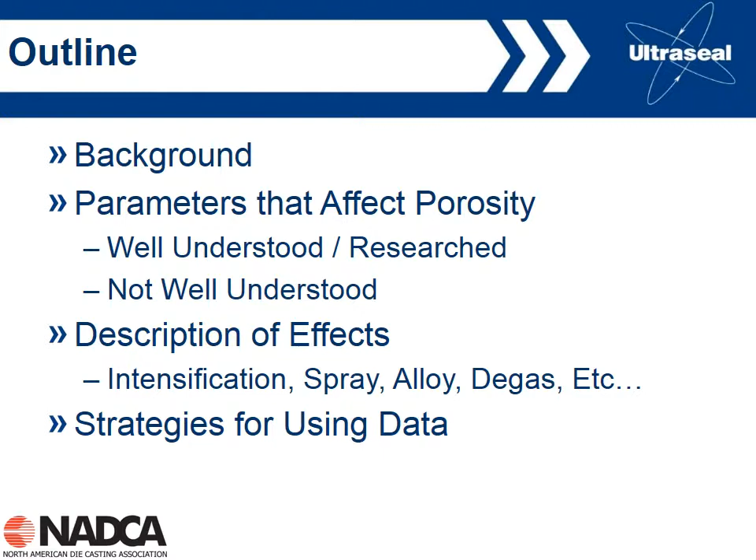So basically what we're saying is if we can control the porosity formation in die castings, we can have control over many of the types of problems that these end users have with die castings. We know many of the process parameters that control porosity. We just talked about a few of them in terms of intensification, fill time, die temperature, metal temperature, things like that. And we have to be careful.

This implies that we have this great need for great control over the process. Certainly there's lots of buttons on both the die casting machine and the peripheral equipment. And Alex Monroe at NADCA used to refer to this as just 'play with the knob' syndrome. So just turn the timer to the correct setting on the ladle, the shot delay, or some other piece of equipment, and that should allow me to fix my problems. Well, that's really shooting in the dark. That's really not a good approach in terms of trying to fix your porosity problems.

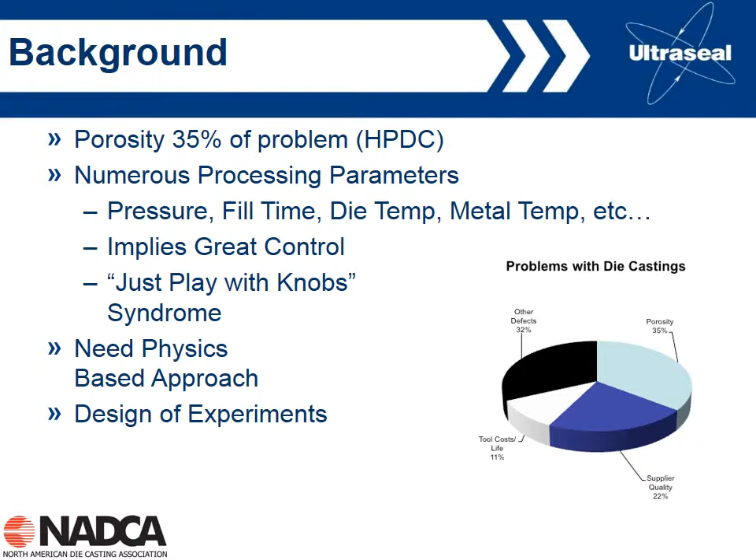That could be an important part of it in your facility, in your plant.

So if we keep going in terms of background, we talked about this in detail in webinar number 1, where there are basically 2 sources of porosity in die castings. We have solidification shrinkage, the volumetric contraction that occurs as we go from liquid to solid, and then there's gas entrapment from various sources. In terms of volumetric shrinkage, for aluminum alloys it's around 6% volumetric contraction upon solidification. With zinc, it's a little less, 3.5 to 4% or so. And magnesium somewhere in the middle, probably about 4.5% or so.

But if you go and look at the literature, when people talk about the level of porosity in die castings, it's very rare to see a casting that's got more than 3% porosity. So this implies that we can't discount one source of porosity over the other. We're going to get both air entrapment and shrinkage porosity in die castings.

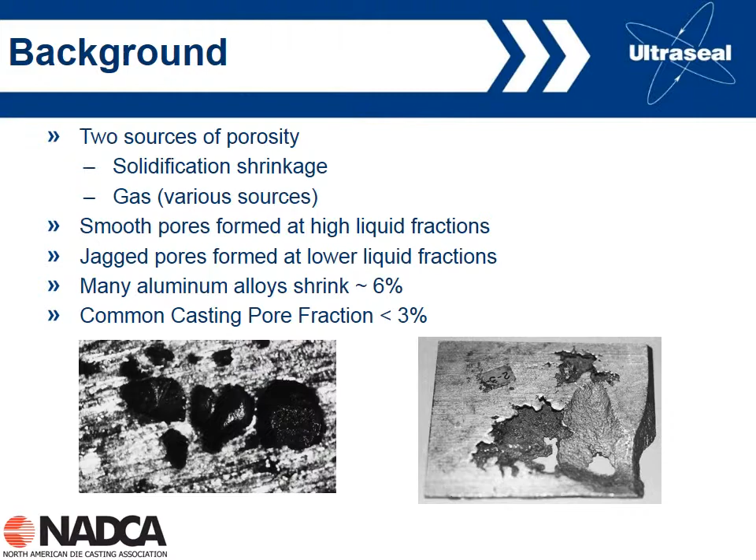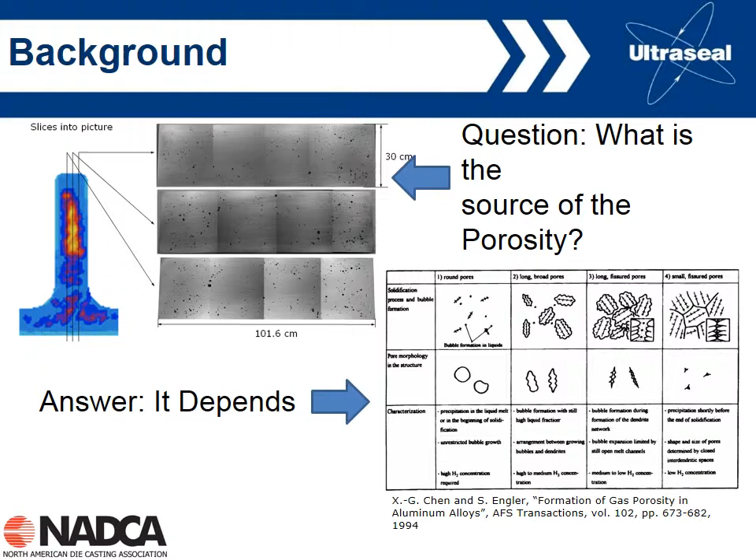So porosity is going from smooth to jagged based on the hydrogen concentration, based on when it forms during the solidification process. Early in the solidification process, they're spherical. Late, they're jagged. But these are all coming from gas.

So what we want to talk about today is process parameters that can affect porosity.

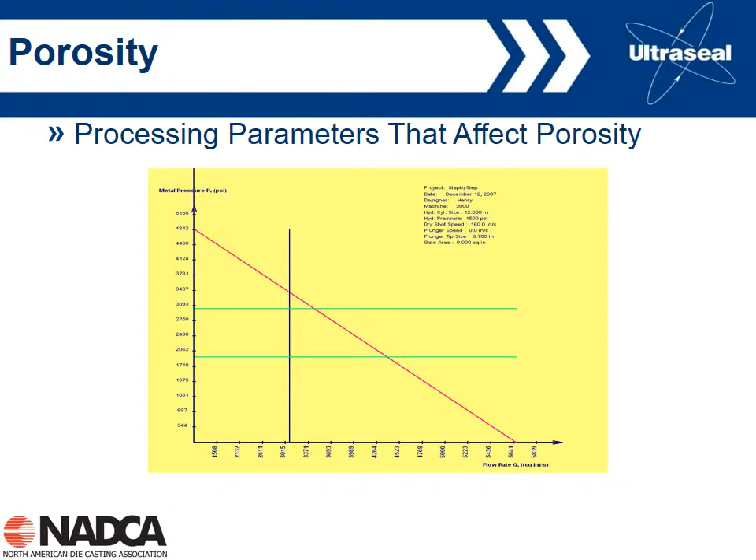Unfortunately, what we find is above 170 bar or so, 2,500 psi, intensification pressure has a diminishing return. What we mean by this is, for instance, if we don't intensify, if we have zero pressure intensification, we're going to get about 6% porosity, because that's the volumetric contraction we get upon solidifying aluminum. If we apply 2,500 psi, maybe we can shrink that down to 1% porosity or so.

Above this, we get a diminishing effect. If we go above 2,500 psi to maybe 5,000 psi, the porosity is only slightly reduced, maybe from 1% to 0.75% or so. So we get this diminishing effect with pressure, and we'll talk about this later as we go through today's webinar.

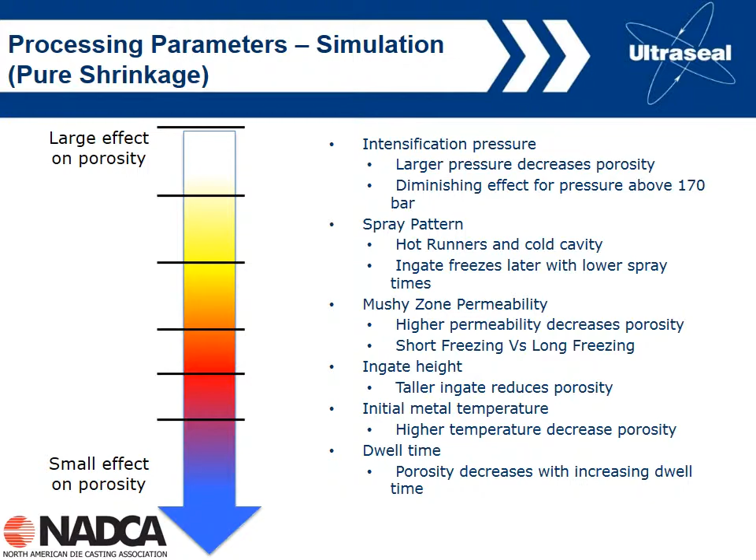In terms of processing parameters, there are a number we can look at. We've got shot profile in terms of the fast shot, the slow shot, and the pre-fill. Note that velocities matter both in hot chamber, not just cold chamber, and we'll talk about why that is later in the presentation.

And then spray, both in terms of spray time and flow rate. We'll see that spray doesn't give us as much control over die temperature as we would like, and maybe not as much control as we think we have.

We'll talk about venting and vacuum a little bit today, but more about that in the next webinar, part 3. If we're using vents or vacuum, we need to make sure either of them are working correctly. If the vents are blocked, that's not going to work; we're not going to get air going out of the cavity, we're going to trap it and get more porosity than we expect.

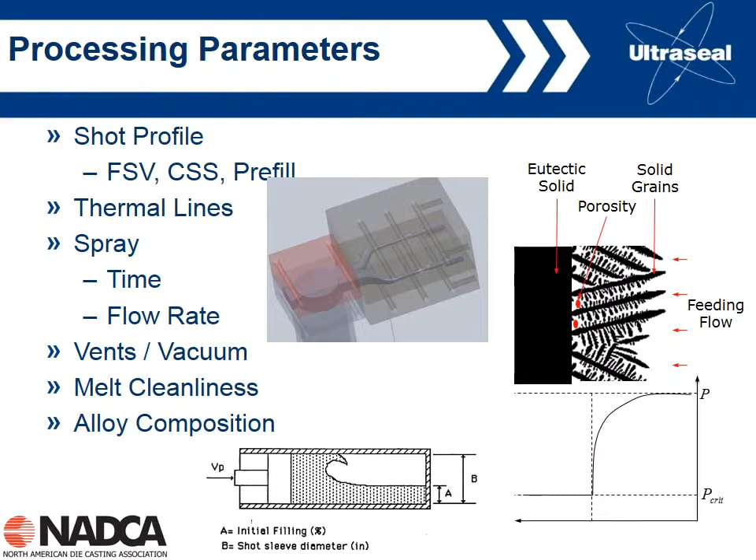So how do we start to evaluate these process parameters?

We should really think of porosity as a superimposed problem, coming both from shrinkage as well as from gas entrapment. Typically in die casting, shrinkage dominates the location of the porosity, and then gas entrapment either increases or decreases the amount of that porosity. The entrapped gas often becomes associated with shrinkage, and this is one reason why we can see shrinkage pores that appear spherical, as opposed to the jagged shape we'd expect.

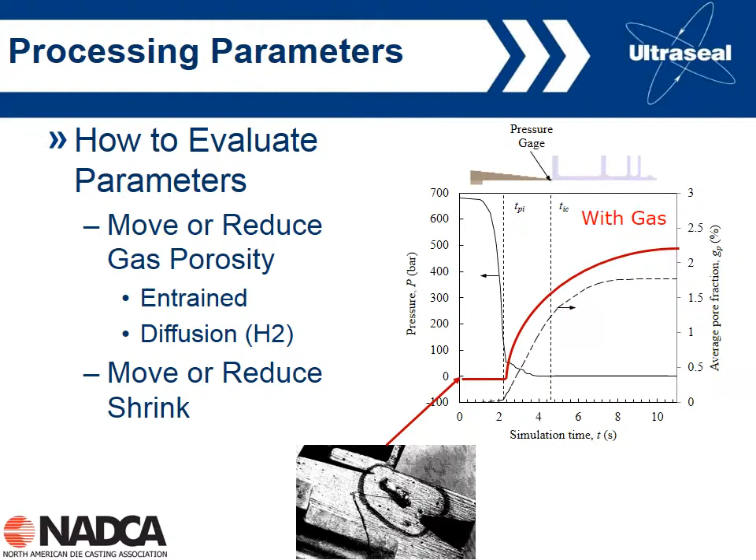So let's talk a little bit about the impact of changing process parameters and the effect this can have on porosity levels and distribution, starting with a discussion of pressure.

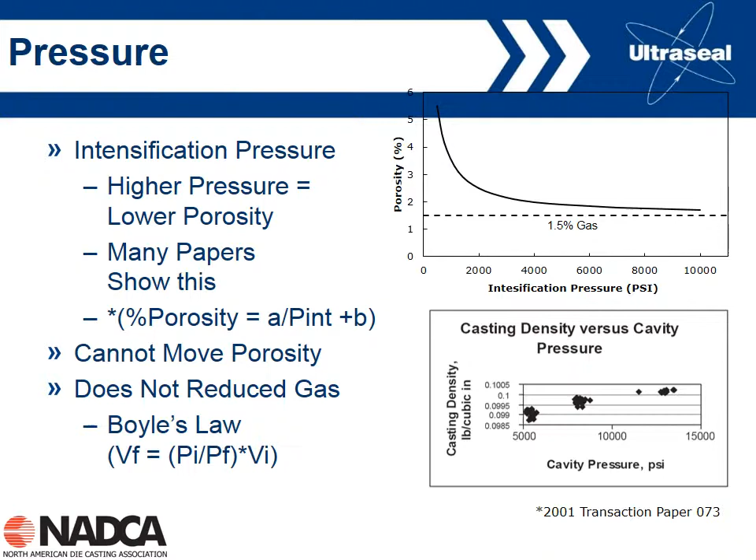So let's talk a little bit about some of the shot parameters on the shot end. We've talked a bit about pressure, but there are other parameters we can play with. This is really more to do with cold chamber—we'll talk a little about hot chamber later.

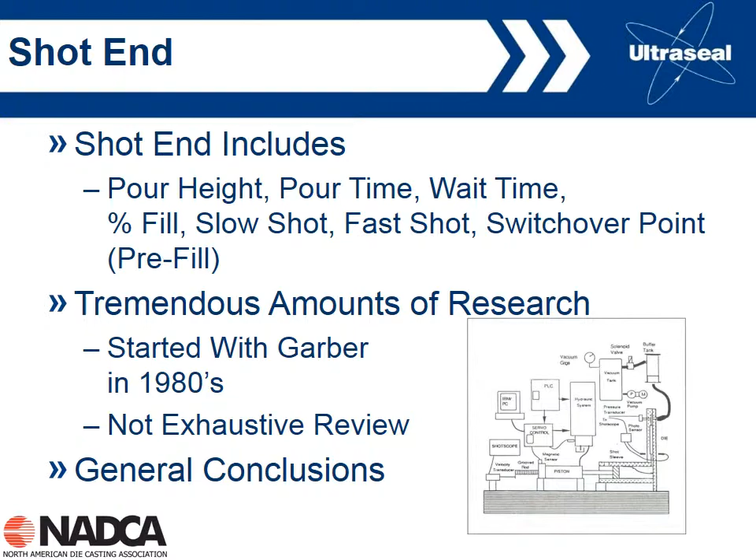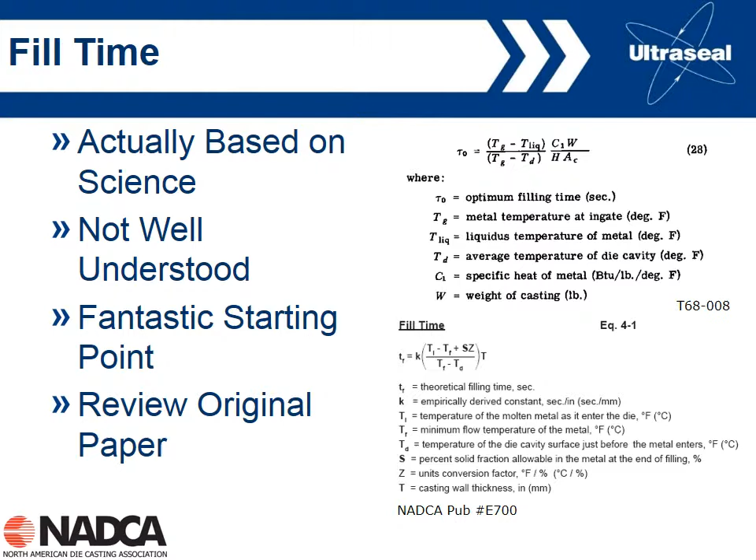Fill time is basically how we control our entire process. And the NADCA calculation for fill time, which is shown here, is actually based on real science. It actually comes from a paper from 1968 and certainly is worth reading if you've got the time. But it's a good place to start in terms of our examination of porosity. So why does fill time matter? So basically this is a basis for the estimation of all of the parameters, when we're designing a die casting in terms of the gate area, the gate velocity, basically provides control over the entire process. So if we get the fill time wrong, that essentially pushes us into an area where it's very difficult to control porosity, so we need to get that right.

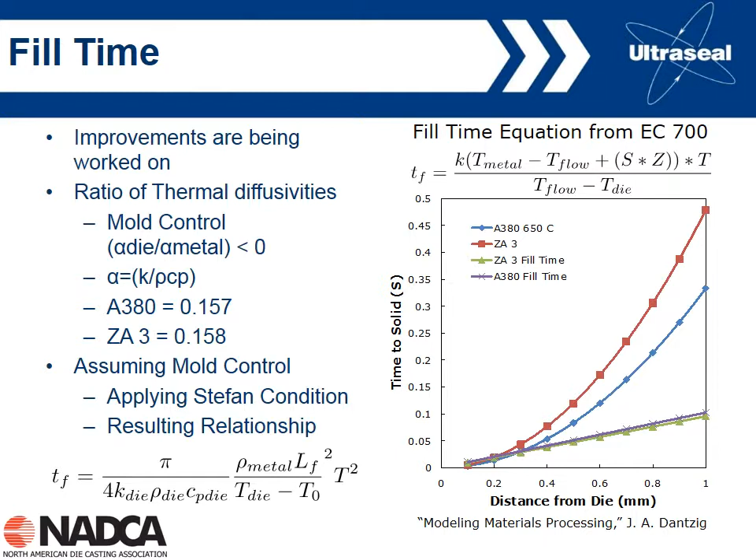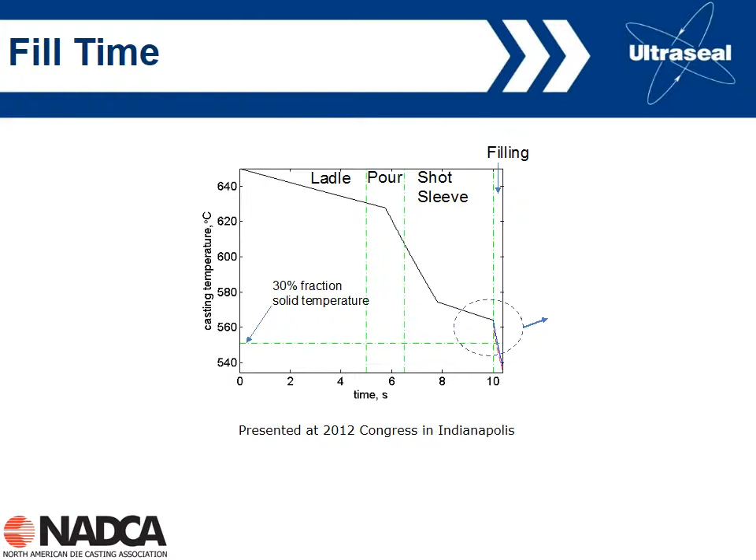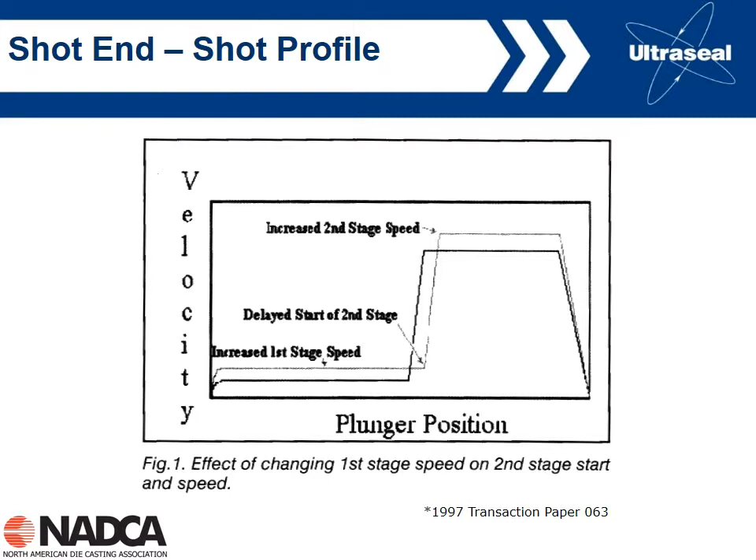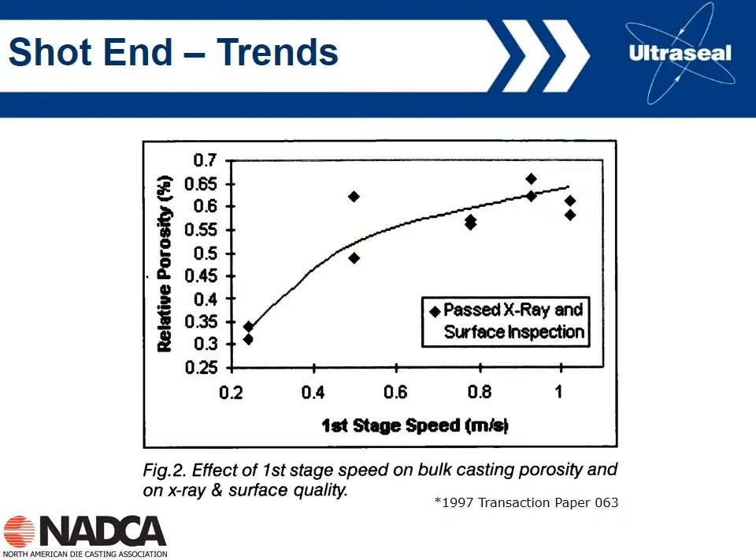So this raises a question: how slow can we go? If I go slowly in the shot sleeve, it's taking more time, so really I want to go faster. But if I go faster, am I going to cause myself a problem with porosities we just talked about on the previous slide? This is the thinking that prompted the work of Garber back in the 1980s.

This is where his equation, shown here on the right-hand side, comes from. The idea was to calculate the maximum speed I can move the plunger at during the slow shot velocity. It's based on the plunger diameter and the fill ratio. Bear in mind, as shown in the middle of the slide, that Garber's calculation for the slow shot velocity only works for a fill ratio bigger than 50% or so.

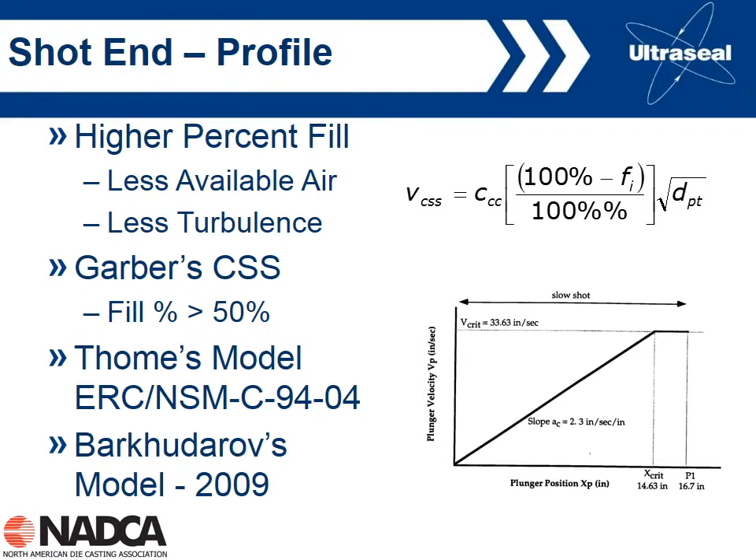There's been some more recent work than Garber's. For instance, Marilyn Thome at Ohio State University came up with a better model in the 1990s. She said that we should use an accelerating slow shot velocity instead of a constant velocity as Garber pointed out. But if you're going to do that, you have to have a die casting machine with good control over plunger velocity to allow you to program an accelerating plunger velocity. Work's still going on in this area — even as recently as 2009, a new model was proposed.

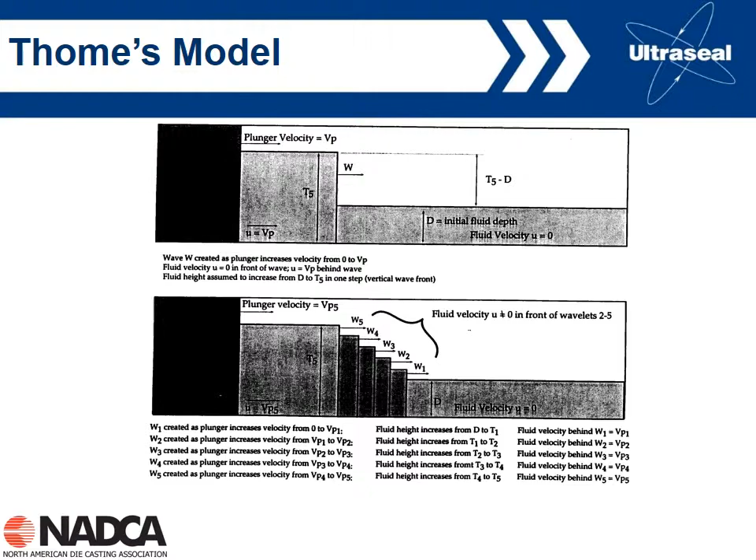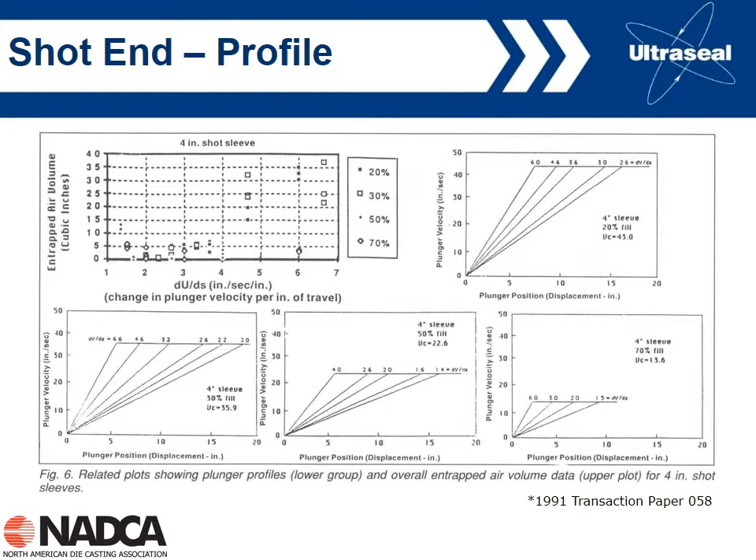What we can see is that the amount of entrapped air is low for an acceleration rate below about 4 inches per second per inch, and above that rate the amount of entrapped air becomes significantly higher. So again, this is giving you additional information in terms of the optimum slow shot velocity to be used in cold chamber die casting.

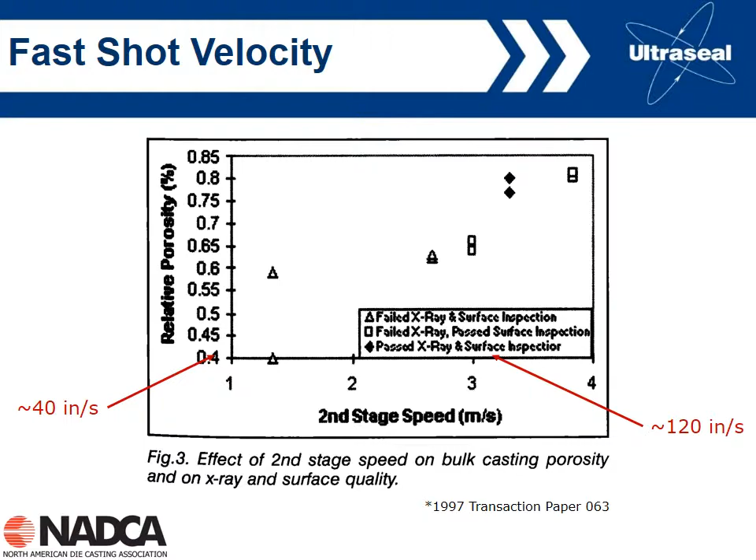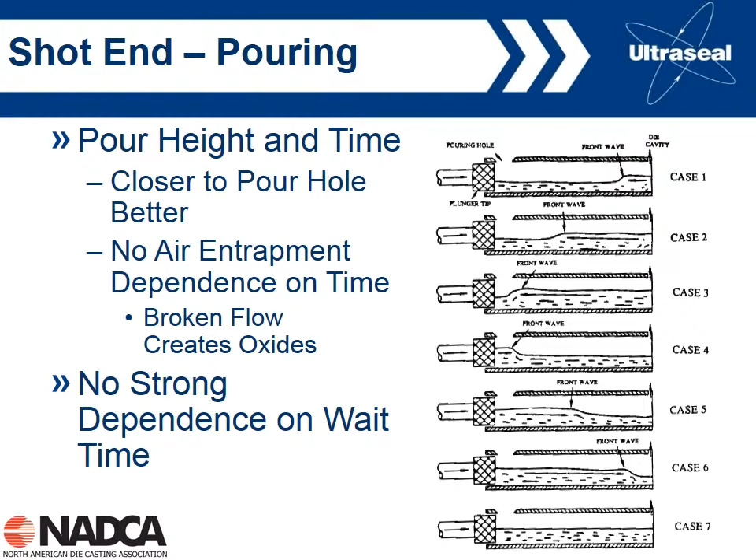So let's move on and talk a little bit about pouring into the sleeve. When we dump liquid metal into the sleeve, it's going to move around. Is this going to affect the formation of the wave during the slow shot velocity? We'll talk about that in the next few slides. But certainly pouring closer to the pour hole is better, because we're minimizing the height over which we're pouring, and pouring smoothly helps as well. We shouldn't stop and start, as that can create broken flow, oxides, and problems with our castings.

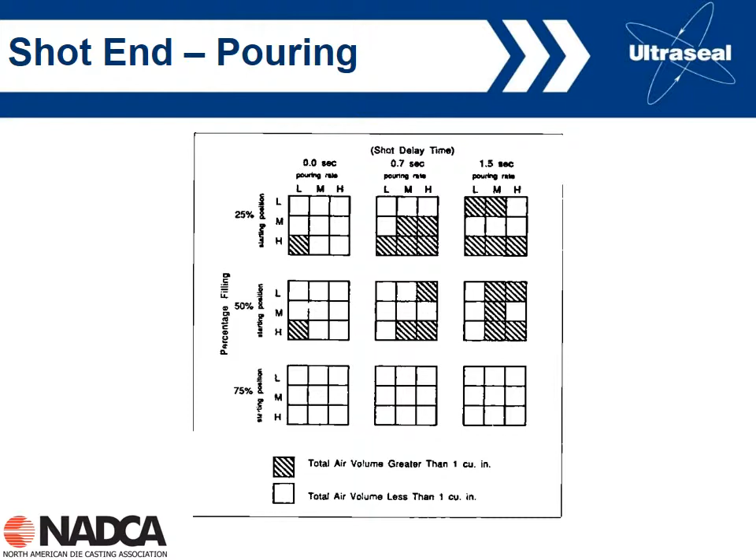So why should longer wait times hurt? You'd kind of think intuitively longer wait times would help, as it's helping to reduce that turbulence from the pouring. So here again, we've got data.

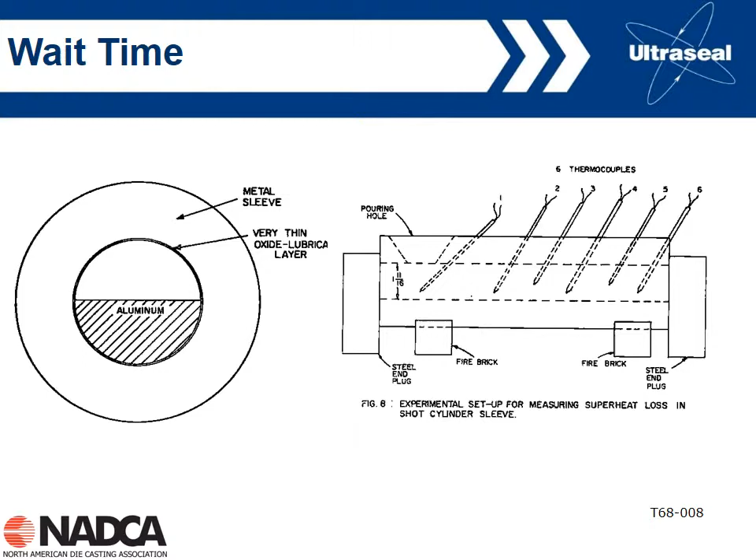We talked a little bit about this earlier, in terms of going very fast can produce problems. So the bottom line is that these data are showing that longer wait times are bad, and we're going to increase the amount of porosity in our castings.

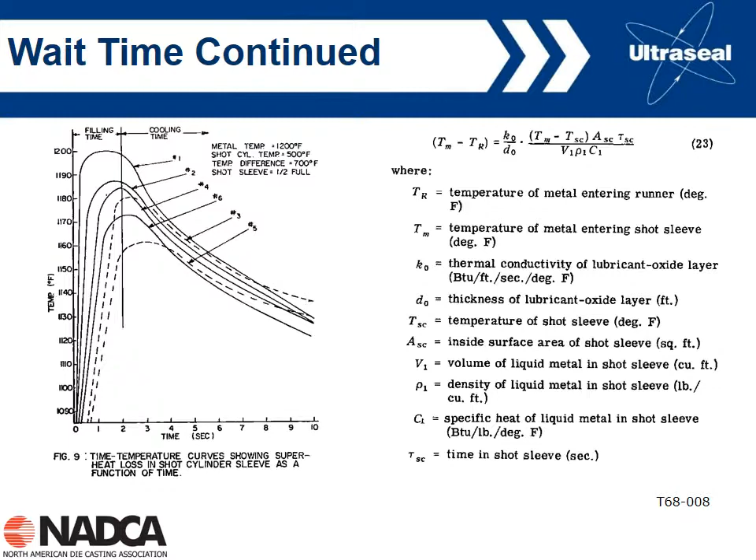So one other thing, talking about shot end pour time - this is unique to a hot chamber - is that we can have a problem occurring when we're returning the piston back to its home position and basically refilling the gooseneck with metal. What we need to do is ensure that we don't entrap air at the tip of the piston. Obviously this is bad, as we could inject that air into the cavity and cause porosity.

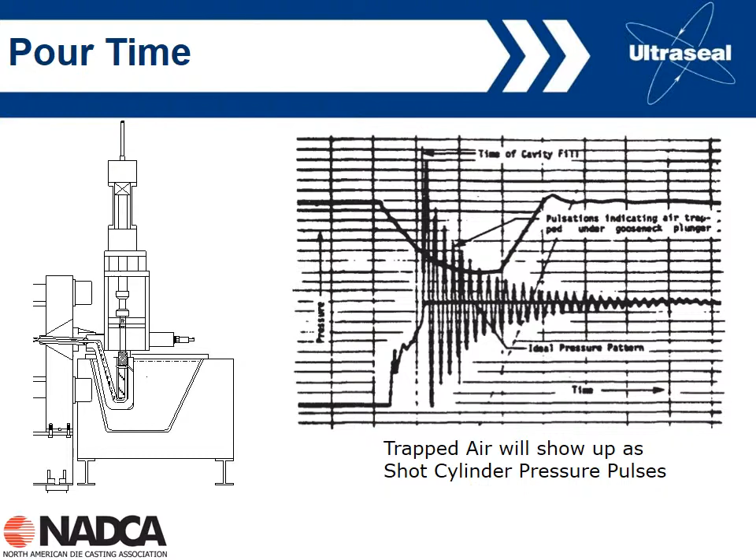Let's talk a little bit about pre-fill. Pre-fill is quite commonly used to help control porosity in die castings. Again, NADCA did a survey and found that around 50% or so of die casters have used pre-fill from time to time in filling their castings. Traditionally we would start the fast velocity either when the metal's at the gate or just before the gate. But with pre-fill, what happens is that we basically continue the slow shot velocity into the cavity, and it's certainly been shown that it can reduce porosity in die castings.

And certainly a number of papers have shown this. We get similar results based on percent of castings passing or failing X-rays. So pre-fill can be beneficial - basically, the longer delay of the fast shot, the lower the porosity.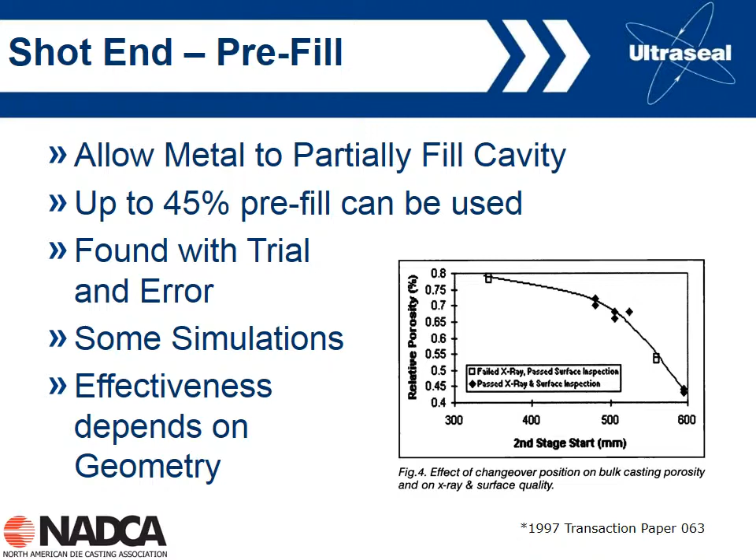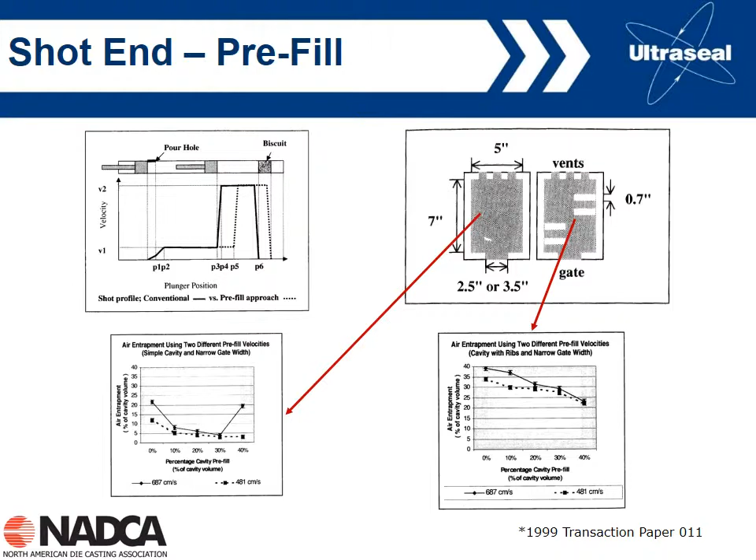Let's talk a little bit about vents and vacuum. Obviously, both can help remove air from the cavity in terms of reducing porosity. However, we've obviously got to make sure that both are working well - vents must be open. We'll talk about that a little bit later.

And certainly, one of the things worth talking about is this new high vacuum process. This is where you get very low levels of vacuum - 100 millibars, maybe even 50 millibars - which is actually quite challenging to get in a die casting die. So some of these new high vacuum systems, such as a High Q process or a Vacural process, enable you to get very low levels of vacuum, but you have to have a specially designed die to do that.

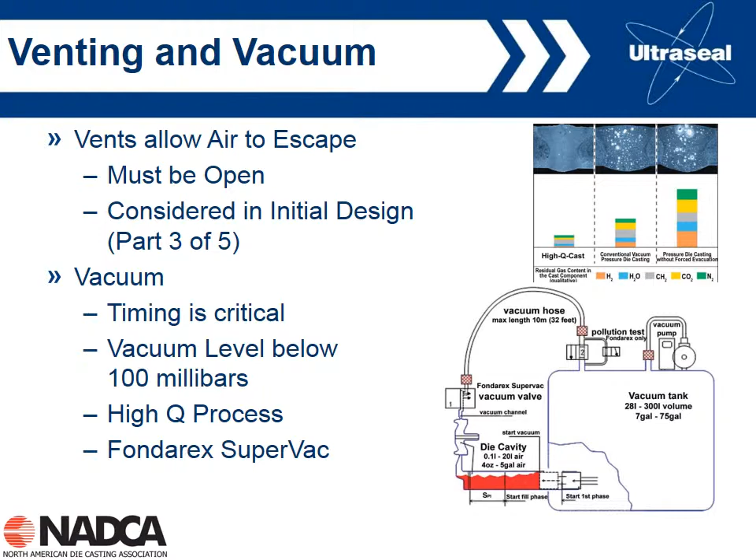Let's talk a little bit about alloy and melt cleanliness. We talked about hydrogen degassing and hydrogen concentrations in the first webinar, so I don't think we need to go over that in much detail.

One other point worth mentioning is that dirty metal, in terms of lots of inclusions or foreign material, can also cause problems in terms of increased gas porosity. It's similar to seeding of clouds, where they seed the cloud to try and get it to rain. The seeding creates water particles that turn into rain. In our case, foreign particles will seed the porosity and cause it to come out. So oxides, inclusions, and foreign materials can cause increases in porosity in our castings.

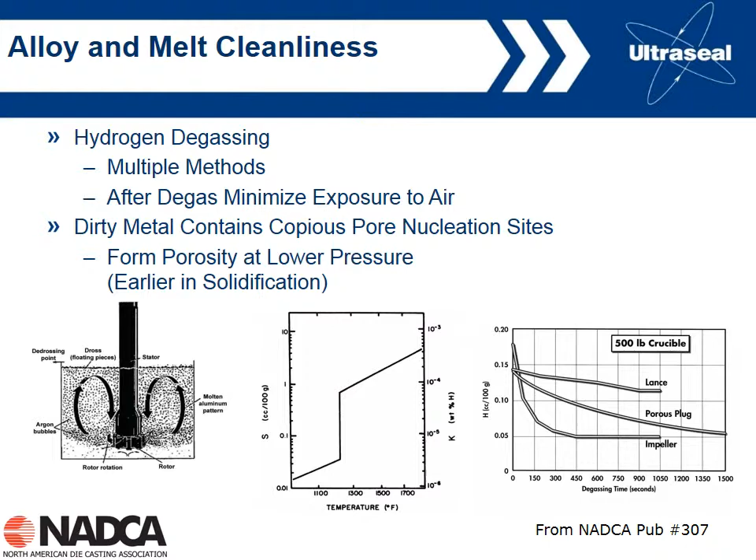Talking about alloys again, we covered this a bit in the last webinar, but this is actually data taken from a Congress paper from 1987. What they did is modify the silicon content of the alloy. They looked at alloy 380, which has a nominal 8.5% silicon, and alloy 383, which has a nominal 10.5% silicon. What they found is they could not get a good casting with the 383 that would pass X-ray inspection, but when they changed over to alloy 380, it was not a problem passing X-ray inspection.

This can be explained again by talking about the width of the freezing zone, the width of the mushy zone we discussed previously. If you look at the aluminum silicon phase diagram in the bottom right, this is the freezing range for the 383 alloy - it's pretty narrow, while the freezing range for the 380 alloy is much wider. As we talked about in the first webinar, short freezing range alloys such as 383 tend to produce macro porosity, while wider freezing range alloys such as 380 tend to produce more widely dispersed micro porosity, or smaller porosity.

So in both alloys we're going to get about the same amount of porosity, but we get smaller and more widely distributed porosity in the 380, shown here on the top right. This can allow us to pass X-ray inspection if we're having problems with a large pore in 383. The iron concentration of the alloy can also affect things. If you have a high iron concentration, during solidification you tend to get aluminum iron platelets coming out in the microstructure. These platelets form pretty early and can block the feeding channels we've talked about for feeding the shrinkage. So high iron can also give you high levels of porosity in your castings.

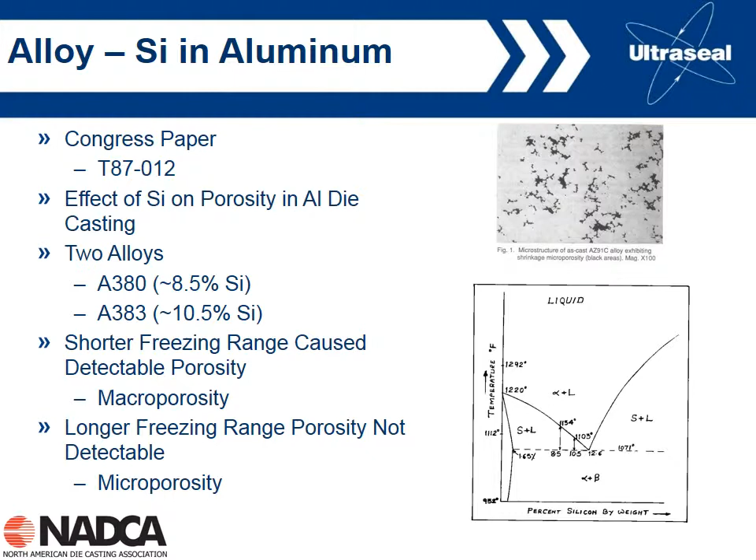So let's talk a little bit about die temperature. This is really the last category that can have a big impact upon reducing porosity. The goal here is to get directional solidification, as we talked about. If we can get directional solidification from the extremity of the casting back towards the gate, that helps us feed the shrinkage, because the additional metal we're feeding with is coming through the gate. So avoiding isolated heavy sections in the casting is a good thing.

Over the next few slides or so, we're going to talk about thermal control in the die, the effect of thermal control from internal cooling, and effective thermal control from spray, in terms of how those can actually affect our porosity and how much control we really have over each of these two processes.

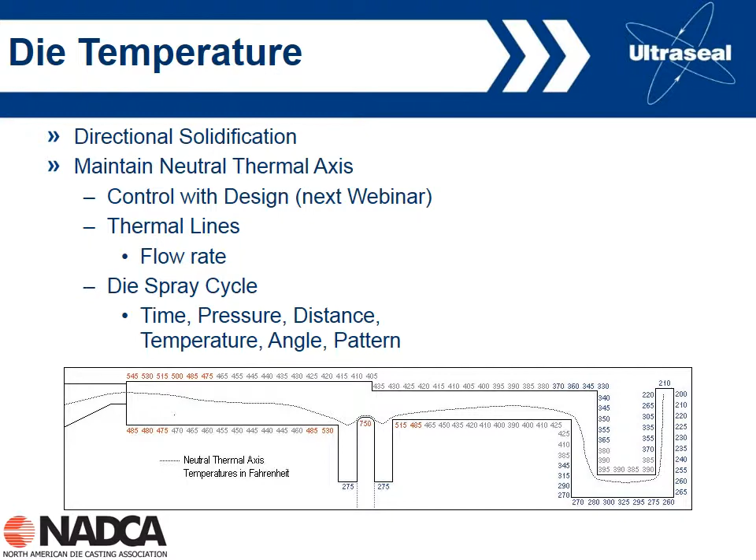So we really need to understand our heat removal rate, HRR, basically from the thermal lines - either oil lines or water lines. We can certainly use computer control these days. Units are available that allow us to turn on and off, or turn up and down, the flow of the oil or water based on temperature requirements.

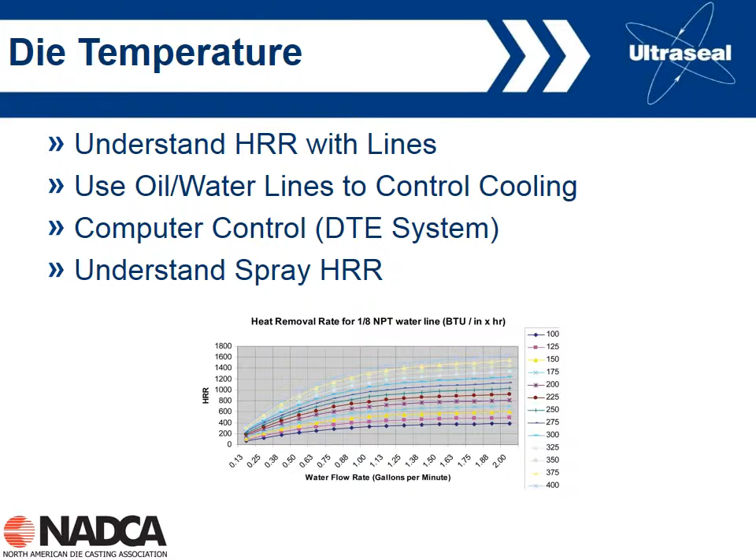In fact, we might actually be hurting ourselves, because if we have a higher flow rate, we're getting more lube on the die, as we talked about last week. That can cause more porosity. We got more water around, and again, if we don't get rid of all the water, we may get vaporization and porosity in that way. So it's reasonably limited in terms of what we can do with spray. We don't have total control over controlling the die with spray.

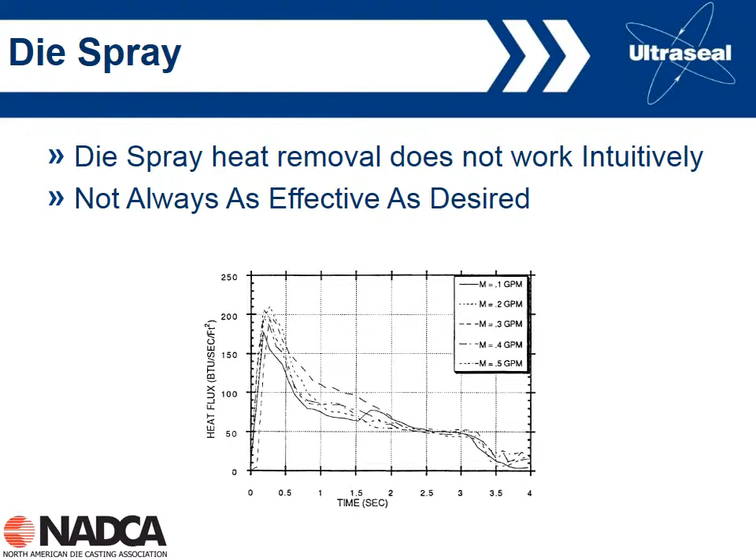So here, we're talking about the Biot number. We're not going to go into all this information here, but this is interesting information if you want to look it up later. Let's focus on the diagram here on the right. So if the Biot number is very, very small, much less than 1, then we basically get this temperature profile shown here. If the Biot number is very large, down here, then we get more of a gradient through our die material. So for a 1-inch thickness of H13, basically the Biot number is 4, which is obviously much greater than 1, and so we get this kind of data shown here.

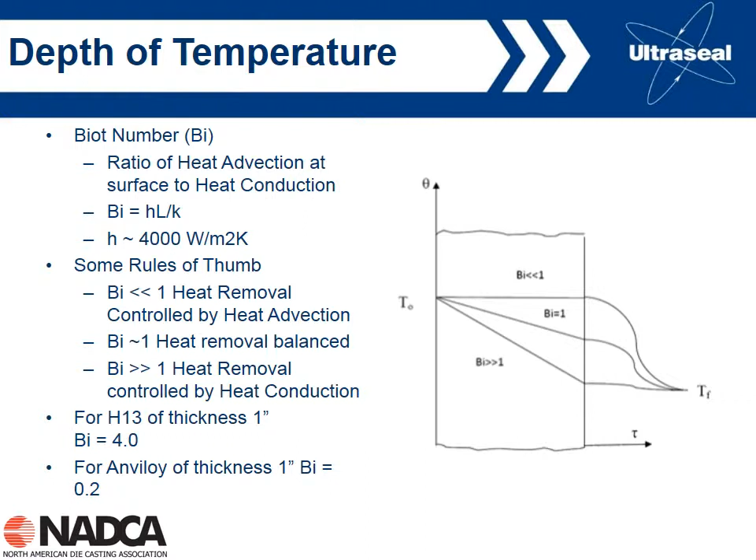For a much higher thermal conductivity material such as Anviloy, which people use in parts of their die, the Biot number is 0.2 for a 1-inch thickness of Anviloy, so that's much less than 1, and so we get this kind of gradient with Anviloy.

So what does this mean in terms of heat extraction? What it means is that we're looking at here is the temperature of the die versus time for different depths into the die. So 1.5 millimeters is basically adjacent to the surface versus 35 millimeters. 35 millimeters is just less than an inch and a half. So if we make our casting or spray our die at the surface, 1.5 millimeters, we see a big impact. But 35 millimeters into the die, basically we see no change at all.

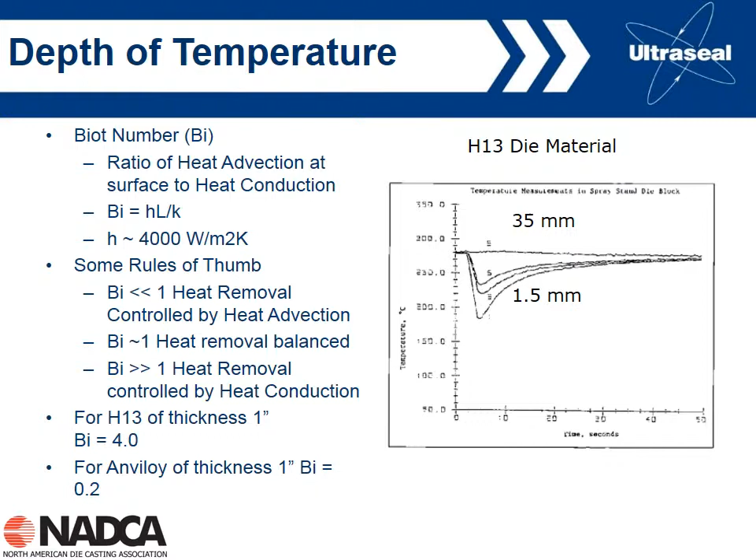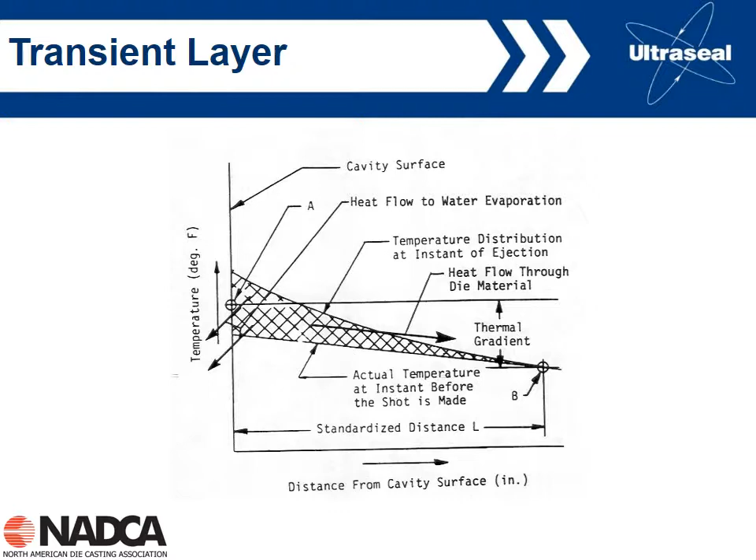So there's no change in the die temperature throughout the die casting cycle at only an inch and a half into the die. So we have this kind of transient layer. We can affect the surface, but only an inch and a half into the die, we have very limited effect in terms of changing it, either by die spray or by the cooling lines within the 60 seconds or so of a die casting cycle. So we have this transient layer. It's a big deal for us die casters because it limits our ability to control the die temperature and therefore to control porosity. We can affect the surface, but we have very limited effect below the transient layer of about 1.5 inches or so. And this is one of the reasons why spray doesn't really work the more we apply.

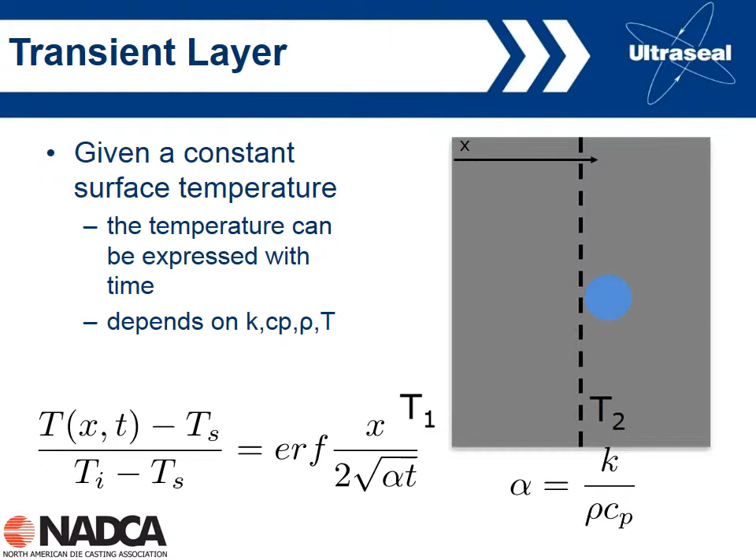We can calculate this transient layer. This is the math shown here. I'm not going to go into detail on the math, but we can use this math to make predictions in terms of both the transient response to heating, which is shown on this graph, and we can look at the transient responses to spray, which we'll see on the next graph. So this is basically looking at distance from the surface versus temperature with time. Basically 10 seconds into the cycle or so, the triangle shown here, we've only transferred the heat about 4 centimeters into the die. Again, this is just a little bit more than an inch and a half below the die surface. So obviously we're getting a very slow response in terms of getting heat into the die.

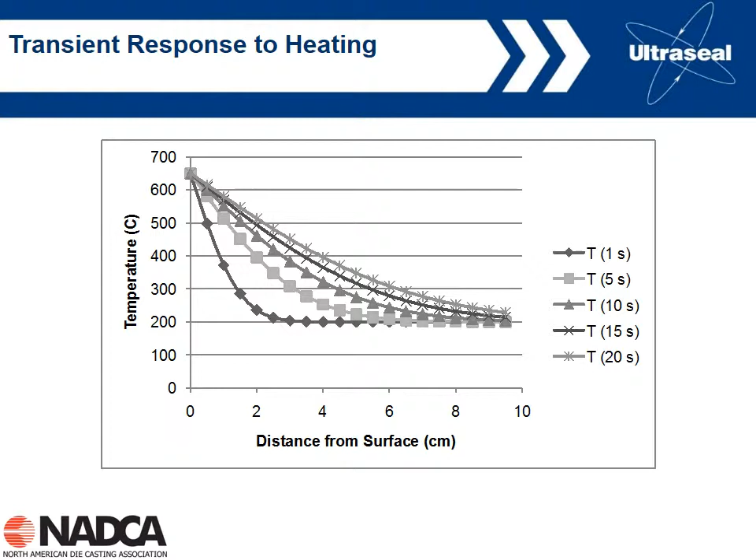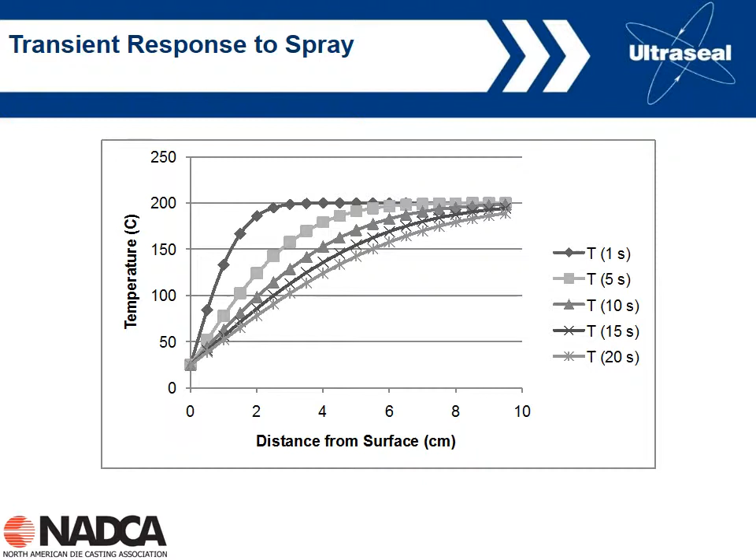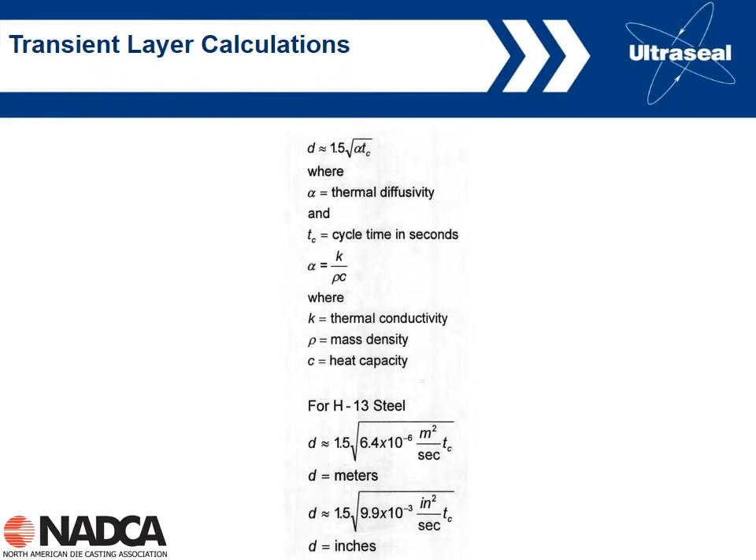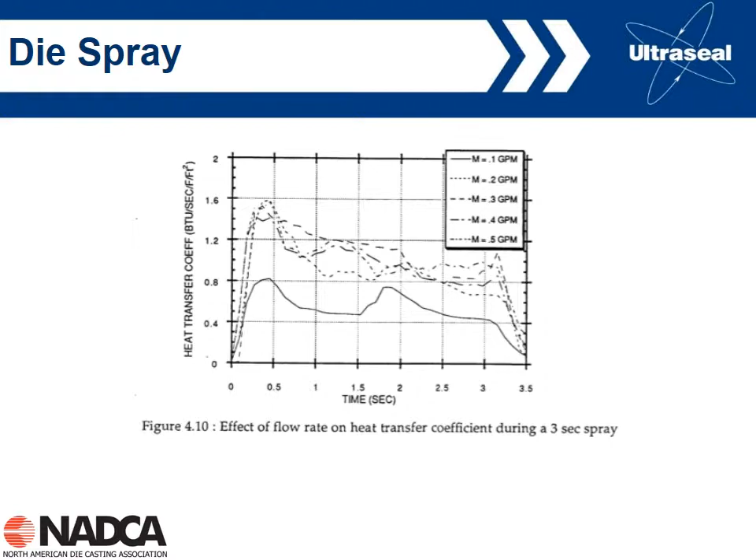So what does this mean? It means that H13, as we know, is a relatively poor conductor of heat. So within the average die casting cycle, 60 seconds or so, the transient temperature depth is about 1 inch or so. So thermal controls may not be as effective as we'd like, or maybe as we think.

For example, for a 3/8 inch diameter water line, if we double the flow rate from 2 to 4 gallons a minute, all we're doing is getting a 5% increase in heat removal. So changing the water flow rate has only a very minimal effect in terms of heat removal rate. And as we've just shown with experimental data, doubling the spray rate, time, or pressure is certainly not doubling the heat removal rate. So we have to have a more fundamental understanding of heat transfer.

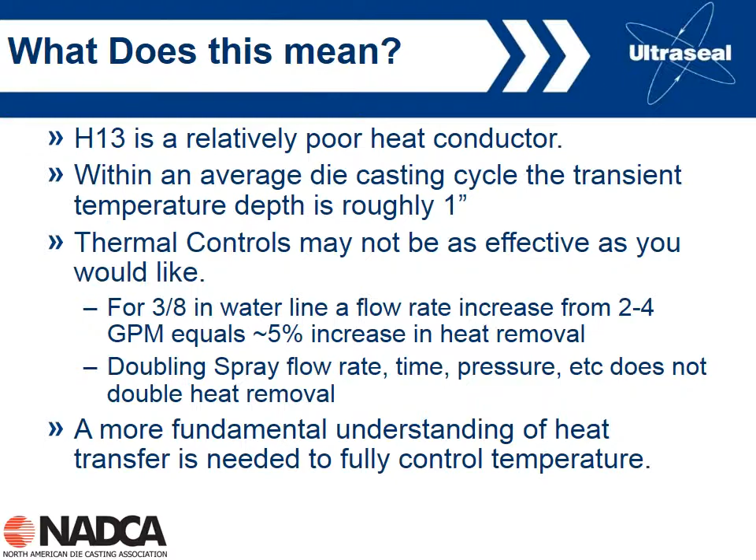So again, we can look at the effect of spray, and here we're looking at the effect on directional solidification. This is a simulation where we're spraying the top of the casting, and we're looking at the effect of changing the spray time on the gate, on the runner I should say.

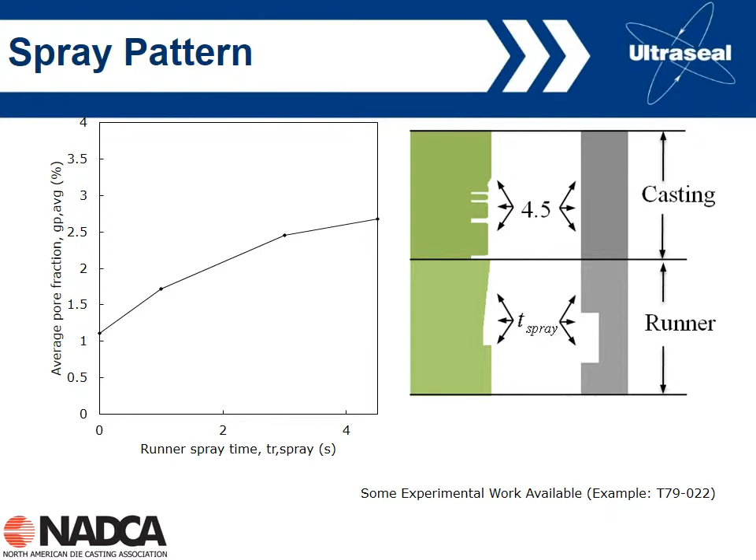As we increase the spray time on the runner, we can actually increase our pore fraction. What's happening is we're cooling the gate too much at the surface. It's solidifying very quickly. Therefore, we're less able to feed shrinkage, and therefore we're actually increasing our pore fraction.

We can look at it the other way around. What happens if we change the amount of spray on the top of the casting? For instance, if a nozzle is blocked at the top of the casting, we're spraying for zero time, and so we're going to get more shrinkage porosity at the top of the die. So both of these are opposite in terms of what we would like to do.

What we'd really like to do is get directional solidification from the extremity to the gate. So really what we want is to have the gate hotter and the extremity colder, and therefore we can get initial solidification at the extremity of flow back to the gate, giving us longer time to feed shrinkage, and therefore we can do a better job of pushing more liquid into the mold.

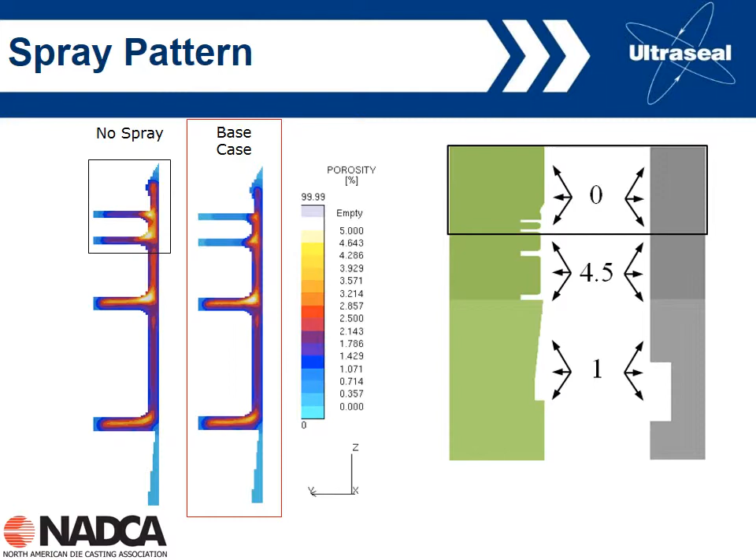That's shown here in the extreme. If we just insulated the gate, i.e. had no heat extraction at all from the gate, we get a better case where we can reduce the pore fraction. But even so, even with the insulated runner, we're not totally eliminating porosity. We're going to get porosity in some of these heavy areas.